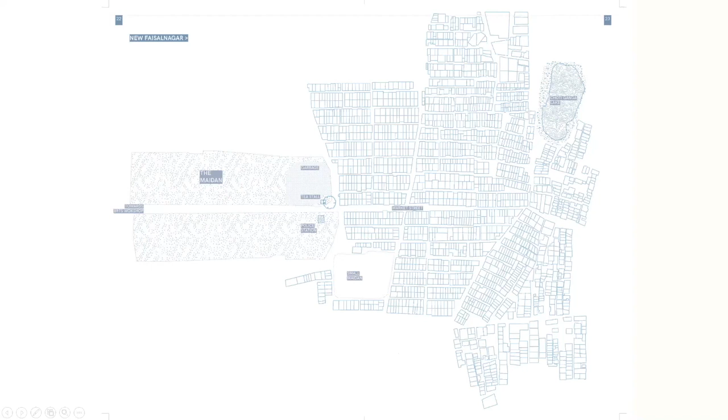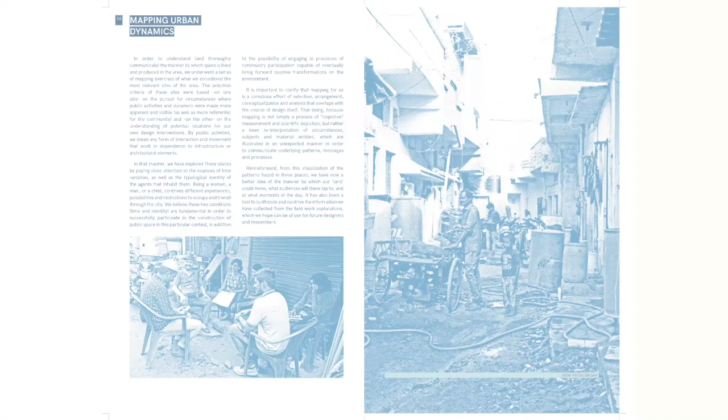So what we did is, through our own academic endeavors, through our studio that we do with CEPT University, we were studying this neighborhood very closely for about a year. We've understood that when you start to zoom into the neighborhood and map the people and activities that transpire through it...

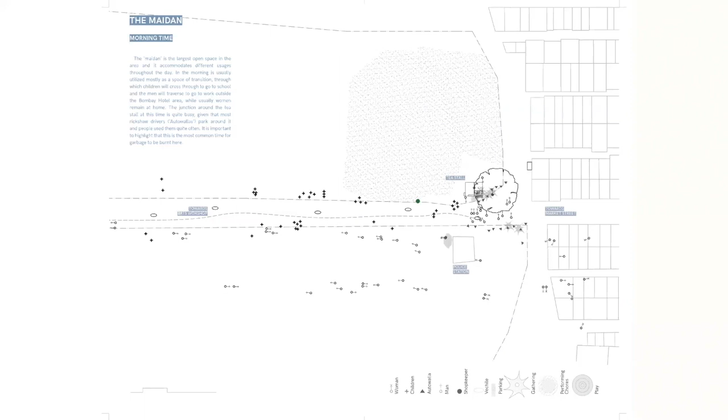...you begin to see that there is a lot more for us to understand and take in as a more complex context. You can see that the Maidan itself has its own life through the day.

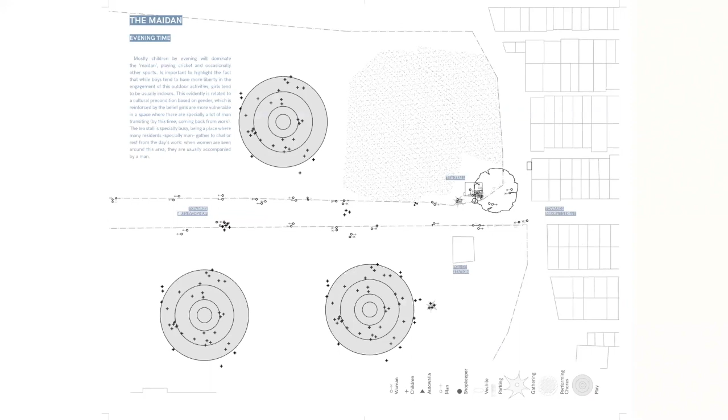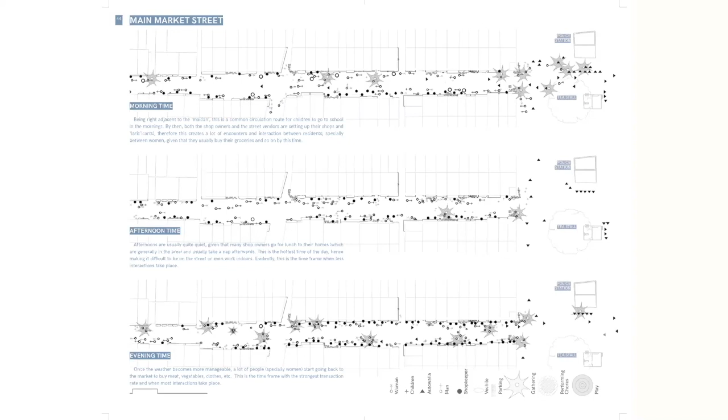You can see the way that the children and the people occupy the space, the different streets—so you have a main market street that has most of the economic activities that take place in this neighborhood.

While the interior lanes, like I mentioned before, you can very clearly see that there is a structural negligence that has led to the kind of photograph you see here. You see that water is not available...

...and therefore you see the entire landscape of the streets having these storage drums, these blue water drums, wherein they receive water through almost a kind of water mafia that exists in the neighborhood—this informal system that can replace what the formal system is supposed to do.

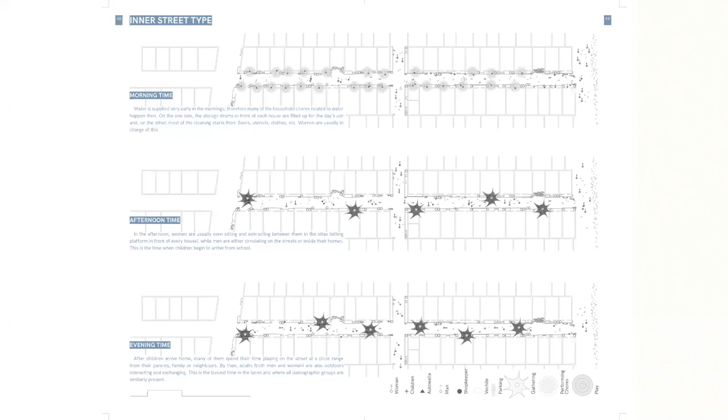You can also see that the inner streets have their own typology. It's the space for women, the space where all your domestic activities spill out. And of course you have the children who make part of this very intense landscape, and the way in which they receive their education—or don't.

After studying this neighborhood for about a year or so, we were very much interested to understand: if there are neighborhoods that do not have access to formal infrastructure that the government is supposed to provide, or what they are entitled towards, then how does one make sure that they can still move forward in their life without necessarily being at a disadvantage? It became important to think about immediate actions that can improve the life of these communities till the government or the system is able to bring in a more formal structure.

And therefore, we came up with this idea, which we call the loose space strategy. Essentially, this is the temporalness or the temporal architecture, the temporal response that one can give that can last from a few weeks to a few years, depending on how the more permanent solution can come into place.

So what we understand as loose space strategy is through this book called Loose Space, and I recommend that you read this book if you get the chance. It's by Karen A. Franck and Quentin Stevens. And what they say is that loose space is essentially a social phenomenon of appropriation, a space without absolute definition, and it has a function, form, and encompasses temporality.

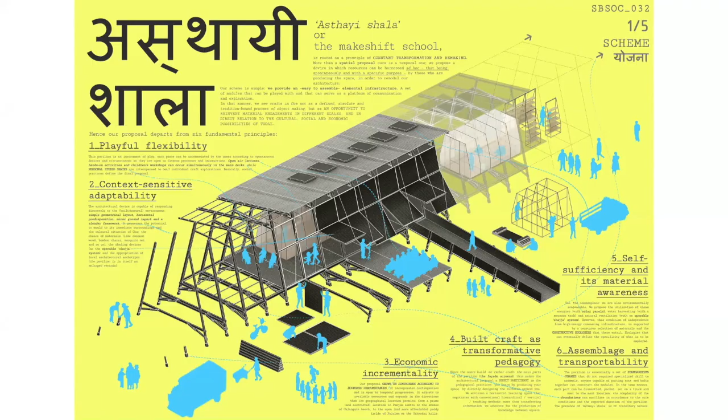So this was a school that is constantly transforming and remaking itself from the idea of a special proposal that can devise a nut and bolt system, so you can very easily screw everything together, and then when you want to dismantle it, you can open up all the nut and bolts and have all of the frames as individuals.

Put it into a truck and move it to another site. We also use mild steel sections because they are also very easily available and cost effective. Then we use bamboo because that's one of the crafts practiced in Goa. And finally, you have the solar panel and the corrugated metal sheet.

So say in case coconut palm wood or coconut timber is not available, then what is it that you can replace that with? That is very important to keep in mind because with context, the different materials change, the availability is changing, and of course your finance is always a key component when you have to look at building.

And then, of course, we have different material palettes that we propose in place of the bamboo, in place of the corrugated metal sheet, so on and so forth.

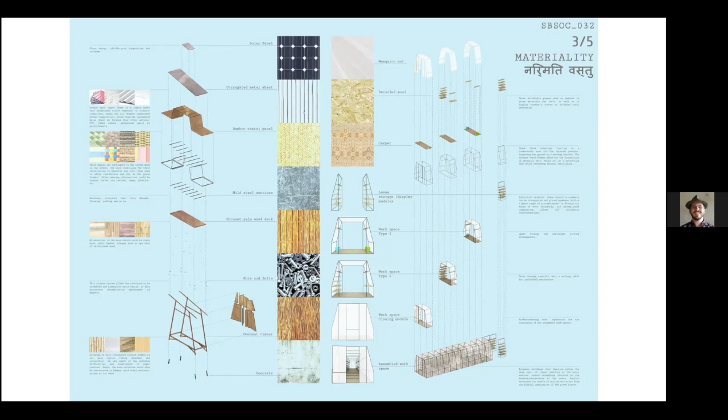While the inner pods, we thought of them as very lightweight metal frames that also have this sort of mosquito net covering. The idea was that because this is within the main structure, it is protected from the weather, and all it needs is some kind of privacy and protection from the environment. So mosquito nets seemed like the most feasible material we could take up.

So this is generally some visualizations that we carried forward to try and look at what the building was like. We also made some physical models. Here also it was important for us to look at how do you make a physical model that can demonstrate the modularity of the building.

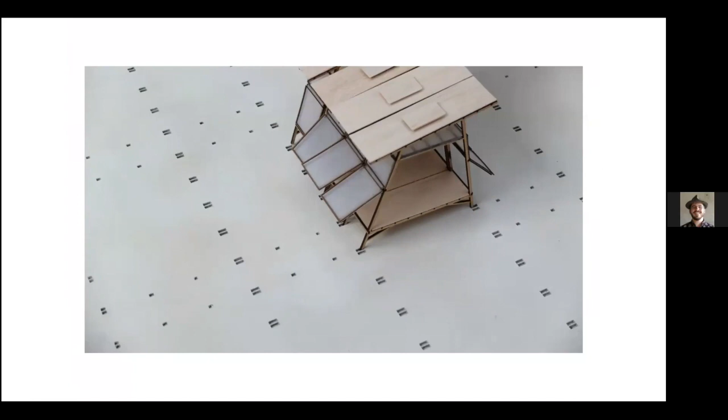As you can see, we had the base, and the model was also made in such a way that the agency of the organization of the different modules was with the people who had the module. So you can eventually change the disposition of all your modules such that you can change the format in which the building is placed on the ground.

So if you have a linear site, you can have the building be more linear. If you have something more squarish, you can change the way by which you organize your modules.

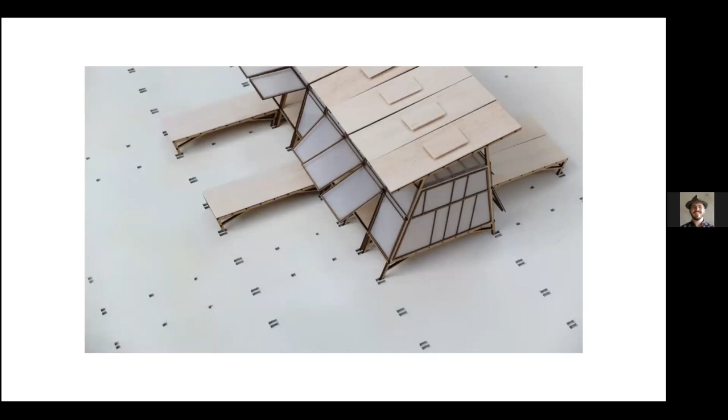I'll go on to the next project, which is called the Apni Lari. This was a project that Sebastian did as part of his master's program and his thesis at CEPT University.

And then we took it forward as something that we call the cart home. So basically, it's a device for living and working on the street. It's a public good of decentralized administration, and it is an opportunity for those in need. It provides an emergency shelter and working spaces. It's essentially a movable furniture that adapts to contingencies.

Again, something that both Sebastian and I deeply believe is part of Chal Chal agency is that for us, research is very important. Every time that we take on a project, a competition, or our own initiatives, we make sure that we do a lot of on-ground research to understand what is existing and then how can we take that forward.

So you can see here that we studied a lot the existing vendor typologies that make part of the Indian urbanity. We looked at what are the different ways by which they are mobile in nature, and what's the different transportation formats that they have.

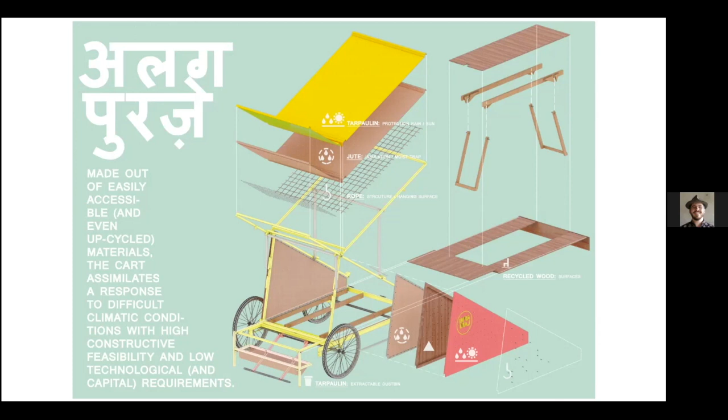There's the use of recycled wood, jute used for insulation and to trap moisture, and tarpaulin used to protect it from the sun. We used rope as a structure for hanging — it was a hanging surface, so you could have different objects hung, so your livelihood could be part of this.

Eventually, we were looking at the cycle of use — how this object could be used differently at different times of the day. For example, you can remove this bench; it's a platform, but when you remove it, you can open the legs and it becomes a bench for your customers to sit on. You have certain drop-down tables, you can make it like a lower table, and it has a dustbin within it, and so on.

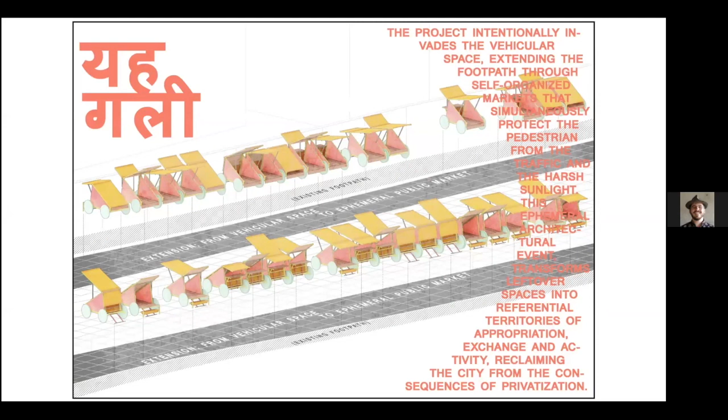Now, one of the questions we usually get asked is that we work at a very small scale, but how do we look at this to have a larger impact? That's precisely where we put in a lot of effort to understand that if one small object is placed on the street but then multiplied, how is it making the street different, adding value to the street and eventually to the public space it conforms?

Of course, eventually this project had different lives, so we also made it part of another competition that looked at refugee camps in Zaatari. We had three different modules that made part of this — one that is a larger market module, and another that looked at not only selling but also eventually could make part of a water system, and so on.

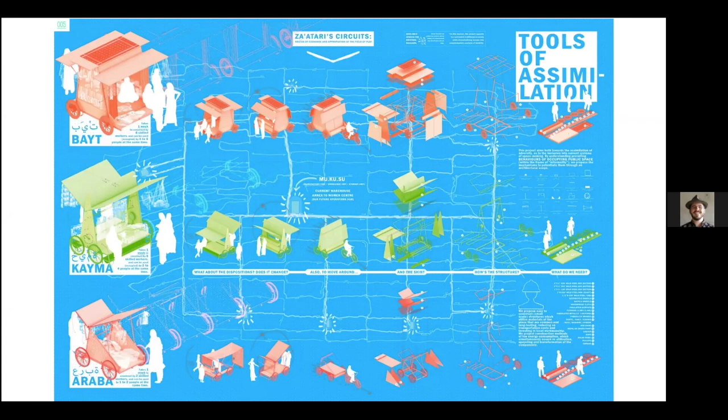Eventually the life of this project was taken to Manav Sadhana, an NGO that works at Gandhi Ashram in Ahmedabad, and they used this particular device. They were very happy to receive it — they did a whole ceremony with it, and eventually it was used for public good, where water pots were kept. Especially in Ahmedabad, the summer is very intense, so this becomes a public service of giving drinking water to people who pass by on the street.

And eventually, with this project we learned a lot with respect to how you move this, how you make it easy for it to navigate through the city — not only in relation to other vehicles and carts, but also for the person handling it. We knew all of the failures, but that's precisely the point — for us this is an experimentation, and it comes with its own risk.

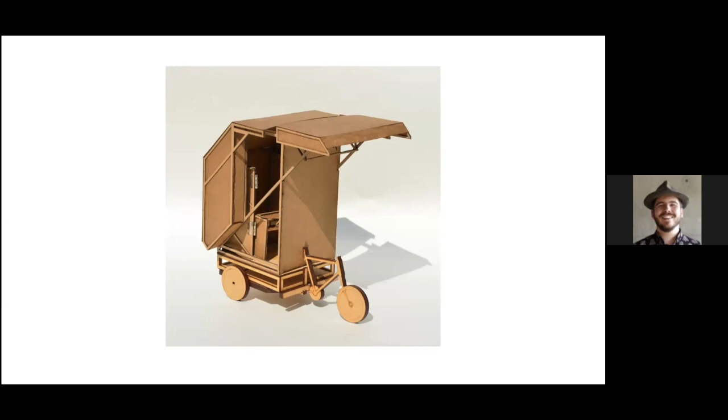As you saw in the photographs previously, drinking water is a huge issue in the community. One of the first things we wanted to do is come up with a project that could address that issue in a more immediate manner.

So we came up with this public mobile water filtering unit that can move around the neighborhood and give access to drinking water to people at their doorstep. One of the first things we did is we customized this entire base, wherein we motorized the entire cart.

It's something that we love experimenting with, which is jugaad, and I'm sure all of you know the concept behind jugaad. You can see that the front of the cart is half of a bike, attached to another set of wheels and a platform, and then we included batteries and so on and so forth.

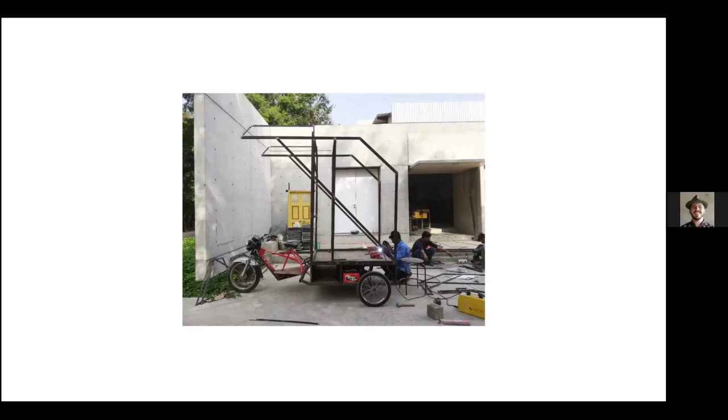Eventually we started to construct the upper structure, and again one of the key materials that we find very versatile and maintenance-friendly is metal sections. We find it very easy to use because the skills required to build with it are easily available, and the materials required are available in your neighborhood market.

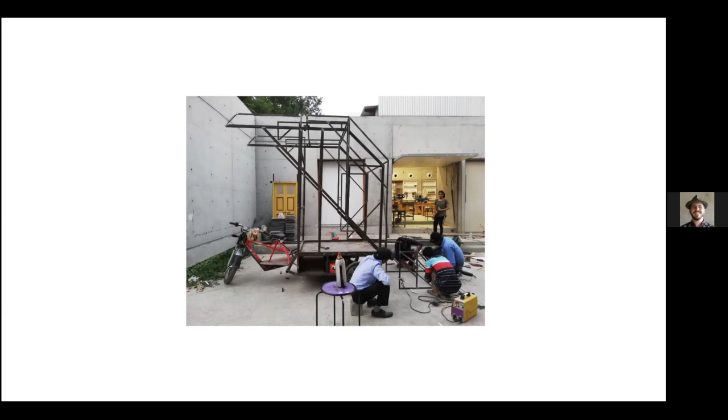For us, that is sustainable, rather than trying to look for materials that you don't find in the city and then trying to get them from other places.

What you can see here is that for the infills, we used metal sheets and plywood to make part of them. These were the welders who built this for us, and these were the carpenters who made part of the process. Engaging with them is very important for us because we learn a lot from them, and they make up a key component of our own processes.

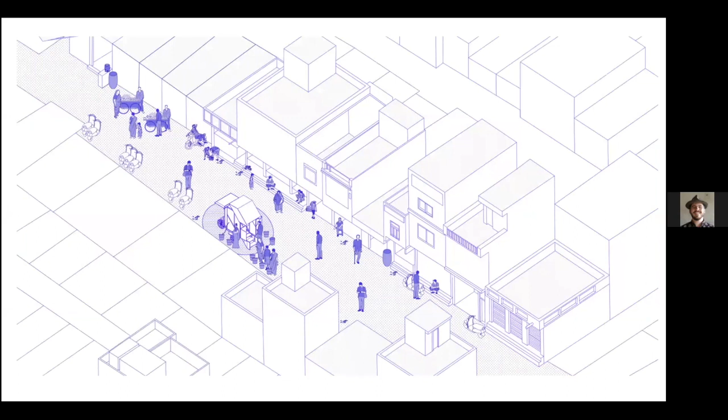This is how the project looks right now. You can see that the water filtering units were fixed. We collaborated with a water company in Ahmedabad called Sarjan, and they helped us design this entire unit such that it could give at least 40 families per week, 25 liters of water each.

Unfortunately, just at the end of this project, when we were finishing it, the pandemic hit in 2020 and everything closed down. We've not been able to go back to finish the project or take it to the site, but we're hoping to do this soon.

These are some visualizations we did of the project, because for us it was important not to just address the functional need of the hour, which is access to drinking water, but also to look at this as a device that could engage people in making space. So it became part of the public, part of the space-making exercise, but also an object of awareness.

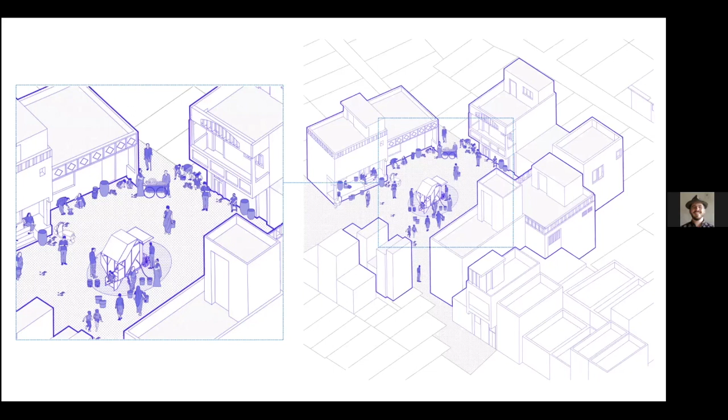In neighborhoods like this, it was very important to spread awareness about the health hazards of drinking water directly without boiling and so on. So this became a pedagogical device in itself.

Moving on, this was a project we did in 2019 as part of the winter school program at CEPT University. We called this the Gyan Ashray.

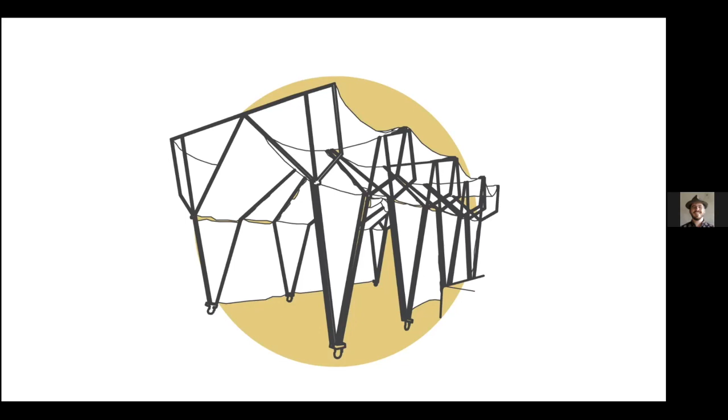This project came to us by chance. We work with an NGO called Center for Development, and through them we were introduced to Pushpa Ben. We were absolutely fascinated by her and her aspirations for the women of her community, the Valmiki community, who are usually at the edges or margins of our society.

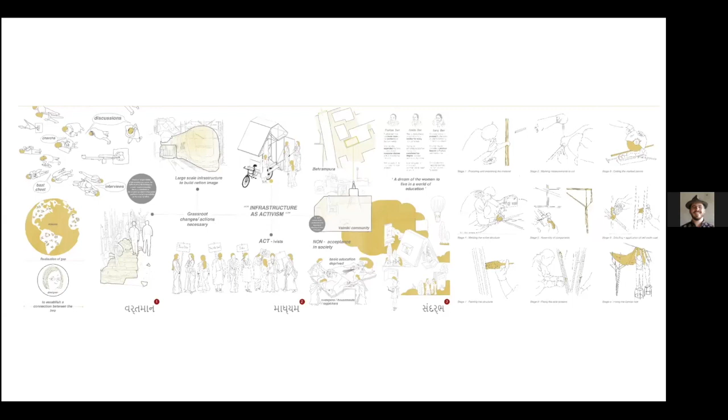For Pushpa Ben, it was very important to empower the women of her community. One of the things they do is meet on the terrace. There's a young woman called Ankita, one of the only women in the community attending college, and she, along with Pushpa Ben, took the initiative to run evening classes for the women, because they felt at a disadvantage not knowing how to read and write - basic skills they wanted to develop. They were running these classes on the terrace.

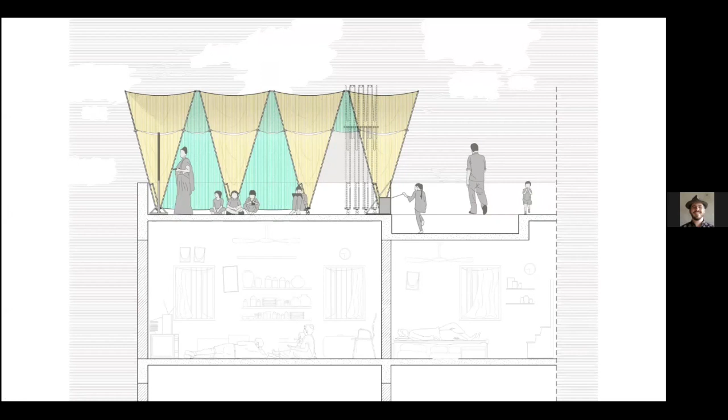Eventually we came up with this project, essentially a retractable roof that could be placed on the terrace and become the classroom for the women. I'll talk a little more about it.

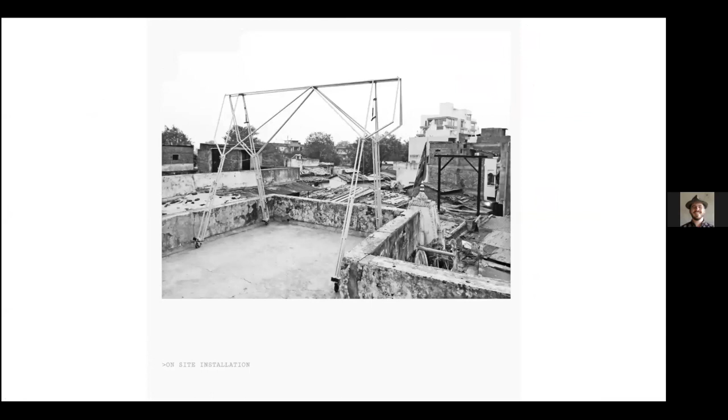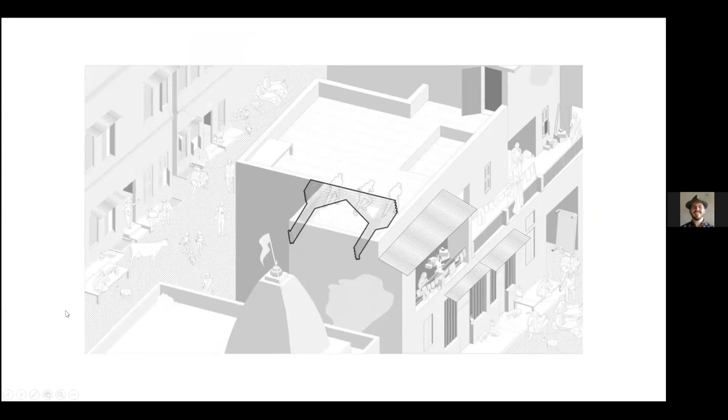For that, we constructed all the metal frames at the CEPT workshop, then transported and lifted them onto the terrace, and started assembling it there. This little GIF shows essentially how we put the entire project together - you can completely open up the roof or close it down based on the need of the hour. This is how the project looks.

Something very interesting came up when we spoke to the women - before designing, it's very important for us to have conversations with the people who will be using this. The women told us that because they were on the terrace, the neighboring terraces usually have men hanging out there, and it's part of their custom to wear a veil over their heads so the men do not see their faces.

They felt insecure and found it very difficult to be studying with the dupatta veil on their head. So they asked us, can you please create an environment wherein we don't have to keep our dupatta on our head all the time. So we took clues from that and looked at the entire veil, not to be on the head, but to be part of the structure.

You can see the structure is made out of fabrics. We also took a lot of clues from the context itself, so the fabric colors came from the way they colored their own houses. Eventually these fabrics were tailored, thought of in a way that they can easily be untied, washed and reused, or if they get damaged, easily fixed. That was something we kept in mind, to give the agency of maintaining the structure back to the women. So this is essentially how it looks.

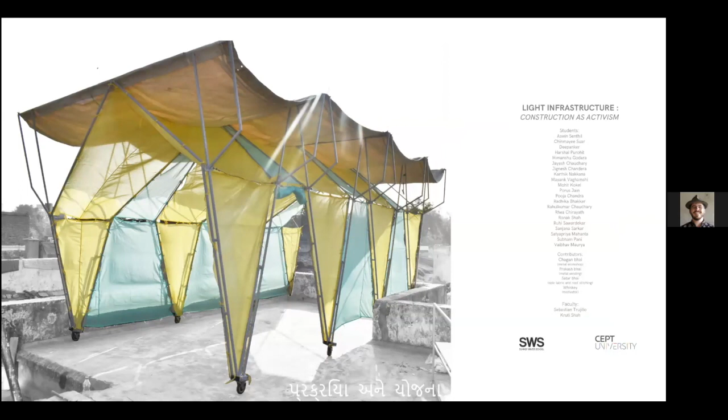Eventually they started to organize art workshops, and the structure became more than a classroom. It became a community space. It became the identity of the women of the community, and a space they were proud of. Eventually they could have their meetings here, community meetings, meetings with NGOs, and so on.

This is a project we were proposing in Colombia, in a neighborhood here. It's an informal settlement, and essentially what we were trying to understand is how we could propose a community center, a mobile community center within the settlement.

To give you some context, Bogota is essentially a very mountainous city, and usually the informal settlements get pushed to the slopes of the mountains, so they are in terrain that is quite difficult. Within this, there is also a lot of violence that occurs in the city, a lot of clashes between different groups.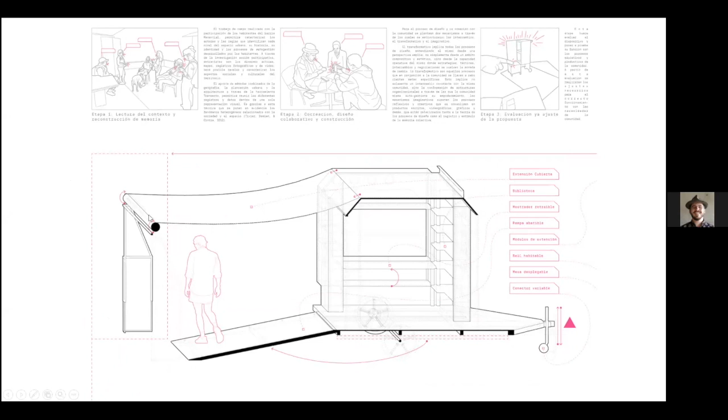You can see this kind of device that makes part of the shading, so you have shades that can be extended. Something small can be extended to make part of a larger community space. We created small mobile units that could house books, making part of a library, and a table and stool system so larger meetings can take place. These are all the different components that make part of that one device, and everything can be tucked into it.

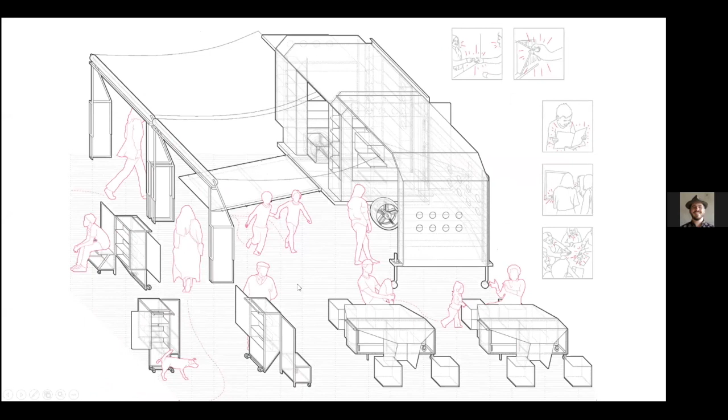In terms of materials, we were looking at L sections in this case. To make it more lightweight, we had plywood, and then we had a lot of fabrics that we were making part of the project.

So this is again a visualization of what we think the project could do. I'm coming to the last bit of my presentation now. This is a year and a half research academic project that we've been carrying out, called Unit Light Infrastructures.

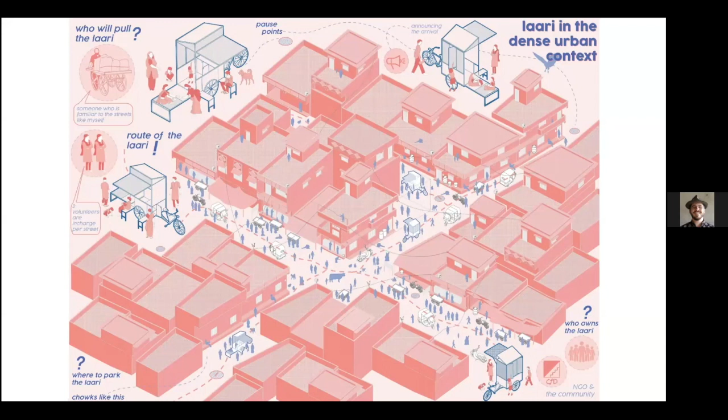We were trying to understand the entire functioning of how women in these communities access public space - where are the different places in the entire community that they sit at, gather at, and so forth. From that understanding of the community, and of the different spatial configurations - things like temporary shading, water infrastructure, the kind of otlas that make part of the architecture itself - those were the clues the students used to make their own mobile device.

You can see here they came up with the entire design development of the project, such that it went beyond the brief that we set up. It went beyond just a device that made sanitary napkins available door to door, and started to become a device that became the identity of the women.

So it became something that could have workshops for women's empowerment, could raise awareness for menstrual hygiene, could also show documentaries and screenings for the women and girls of the community, could carry books and games for the children, because children are usually part of the system whenever you think of the women. And of course, it could engage people in different activities.

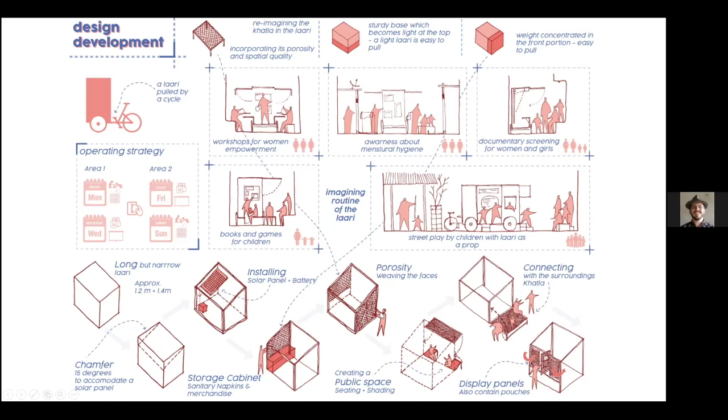Something that was very interesting about this project, and the reason I chose to show it, is the use of the khatla - the weaving that goes into the khatla as part of the identity of this device.

Again, it's something that comes more from a do-it-yourself attitude, as to how you can make the whole device and make the infills of the device yourself.

Another thing we do very consciously in this studio is try to look at design as something that doesn't stop with just the 3D form or the aesthetic making of the project, but goes beyond that, because design is also about how you implement. There's no point to a design if you don't know how you're going to implement the project.

You can see here that the students engaged with the local NGO that works with the community. They spoke to a lot of the women - we had focus group discussions to try and understand what they felt about the design, and then made changes as per the feedback given.

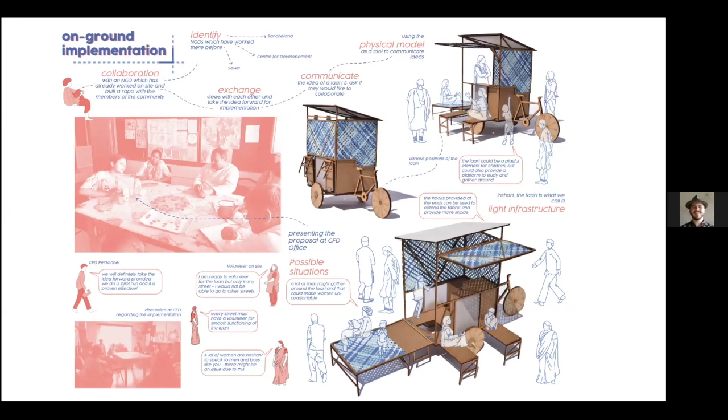The first time we did this studio, there was no pandemic, so we were actually going to build a 1:1 prototype of the project. You can see here we started it, but then we had to stop the entire process.

What the students did is go into the market, research the different materials that were available, bring back samples, and make mock-ups of the different joineries that were going to be part of the working of the device.

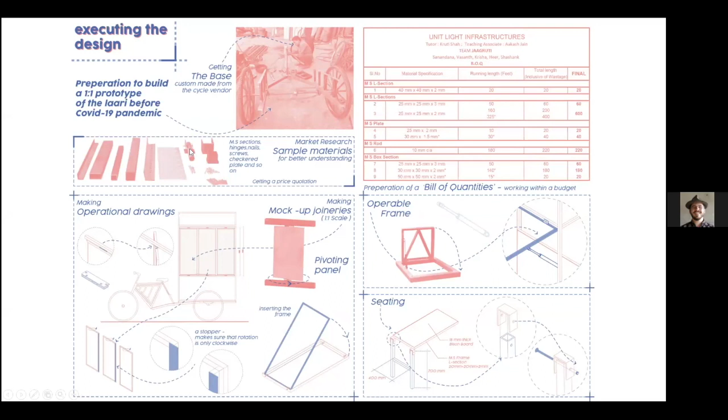For example, if you're using these pneumatic levers, how is it going to work? How do you close it? Where do you fix it? If you're having foldable legs, then what is the kind of joinery that you should make part of it?

Eventually, because the studio went online, we transformed the entire studio and had them make construction manuals, which we thought were very useful to virtually understand the construction process of making such projects, and who are the different stakeholders and users who are part of the entire building process.

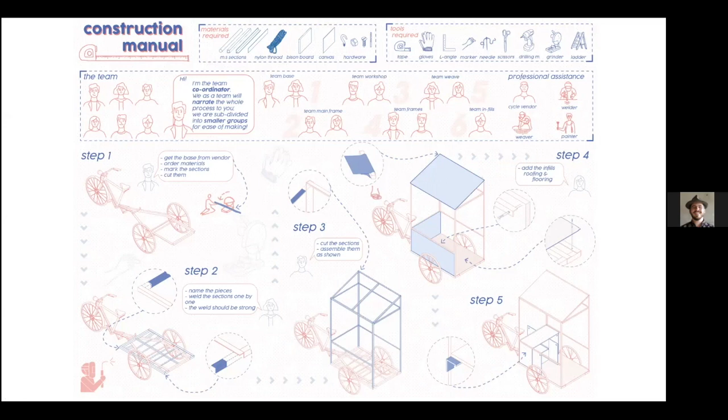You can see these were all the different components that made part of understanding the project. There were details worked out with respect to how you fold things, how you make sure the legs of these fold-out seats were protected, and so on and so forth.

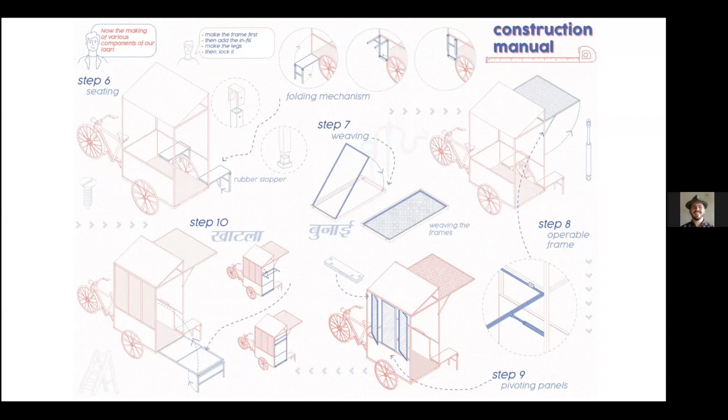This was a little video that one of the students made, and I thought you all could watch it, because it's also a different way by which you can communicate what you want to do with the design.

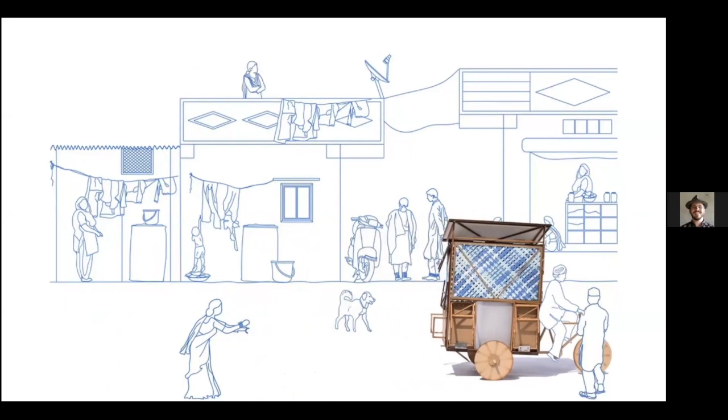So we've run the studio three times. This is the second time we did it fully online, and we transformed the entire design brief to look at transit settlements within Ahmedabad, and how to rethink transit settlements as part of the city.

Transit settlements are groups of people displaced due to infrastructural projects within the city. For example, in Ahmedabad it was the riverfront development that displaced thousands of people. These people were promised housing by the government, but were moved into transit settlements on a temporary basis on the outskirts of the city.

One such settlement is Ganesh Nagar, which came up essentially because of the riverfront development.

As part of this project, students were encouraged to think about how transit settlements can become part of the city, and how to dignify these living conditions, because essentially the government gives a family a 3 by 4 meter plot of land, and then they're left to build their own house, without water supply, without electricity.

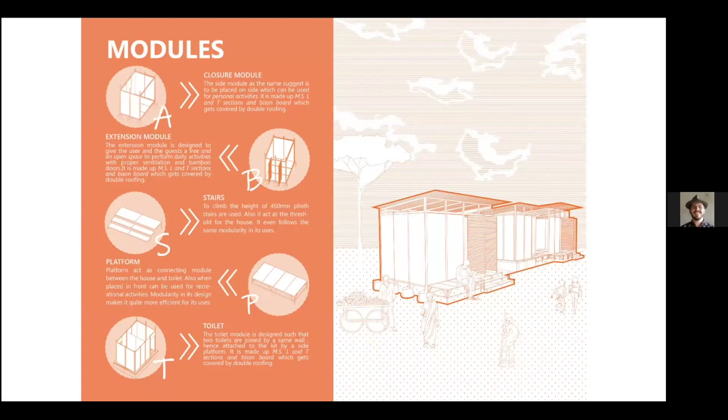The entire housing unit was made with different modules that make up the unit itself. Depending on how many modules you use, you can expand or contract the housing unit. For example, if there are more people, or if my daughter got married and the couple needs their own private space, you can attach more modules, looking at incrementality as value addition to the whole concept of housing.

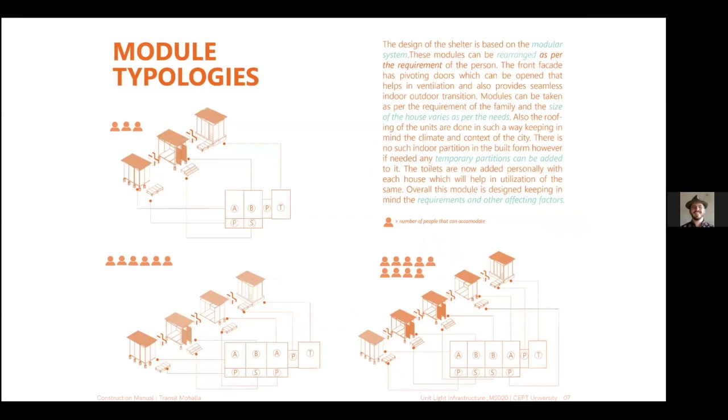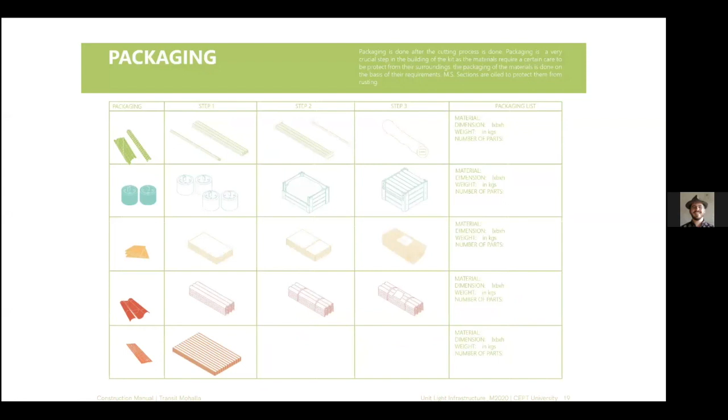One of the key materials used in this case is slotted angles. These are metal sections that come with pre-made slots as part of the section, available in L angles, T sections, C sections, and so on.

What's great about this material is that you can nut and bolt it easily, and you don't need expertise in welding. That's very important, especially since we were looking at these housing units as more of a do-it-yourself or do-it-with-others concept.

It's very important to think about how easily someone can put this together. You can almost think of it as a flat-pack IKEA system, where you receive the kit of parts, open it, follow an instruction manual, and have the housing unit ready to occupy.

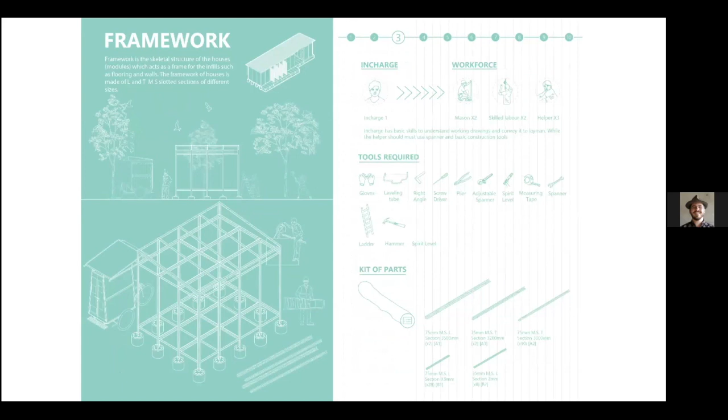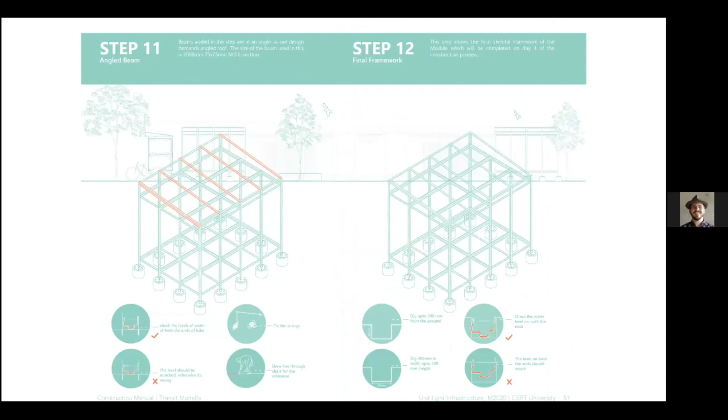Something we do in the studio is create construction manuals. The students demonstrate small nuances to understand the different aspects of the design process, because design processes aren't just done on your table, but also transpire on site while you're building.

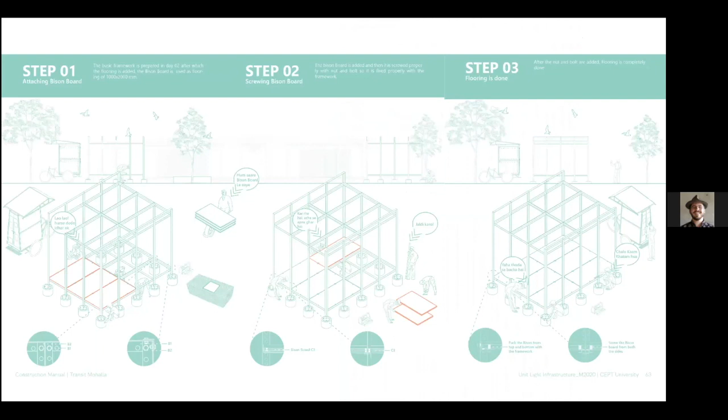I'll walk you through some snippets of their construction manual, but the whole document is available on the website, so I recommend going to see it if you wish. You can also see how the students talk about creating these extensions, and the entire process and stages that make up the building process itself.

Something very important that I missed out earlier is the use of something called bucket foundation. Since you guys are making vaccination centers that are meant to be temporary and not remain on site after use, we found these bucket foundations very interesting. You can use a bucket to make small concrete blocks embedded in the ground, and fix your metal sections by welding or bolting them onto the top of the bucket foundation. For me, that was a very easy way to resolve the idea of foundation, because usually when building something, foundation is problematic since it's supposed to be permanent.

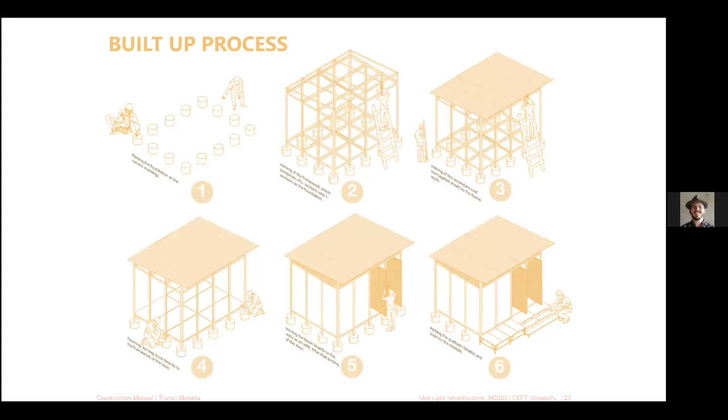This is work from the semester we just finished. Again the brief was the same, but this time we split the entire settlement into 6 components that make part of a larger neighborhood. So you not only have the housing units, but we also came up with something called emergency public architecture - public architectures that make part of community spaces, which I'll show you what the students did with. Then of course you have mobile devices, because mobility and mobile devices make a key component of how the city is built. Then you have structures that make part of the public space, play areas, and so on.

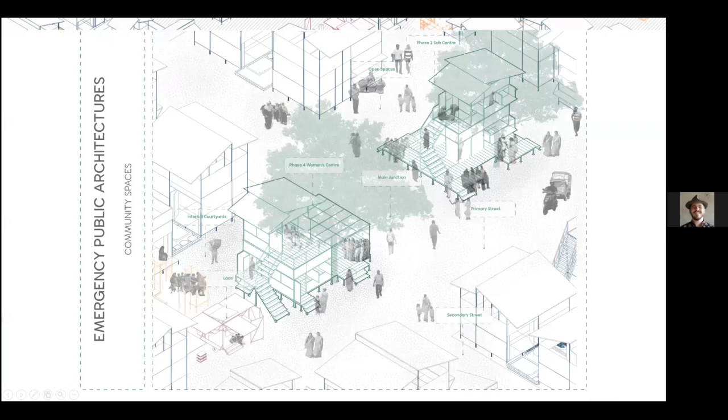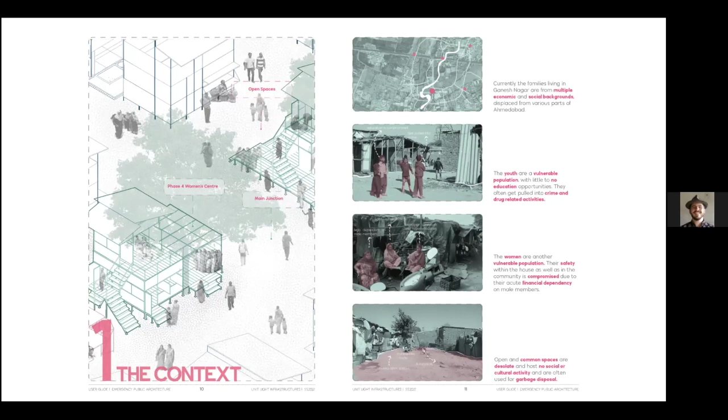I'll walk you through the emergency public architecture - these are essentially your community spaces. What is an emergency public architecture? After looking at the site and understanding the different people and stakeholders, the students recognized that the youth and the women were the most vulnerable population of the site. Therefore, they felt the need to make centers that could become safe spaces for the women and the youth. So you have the women's center and the youth center.

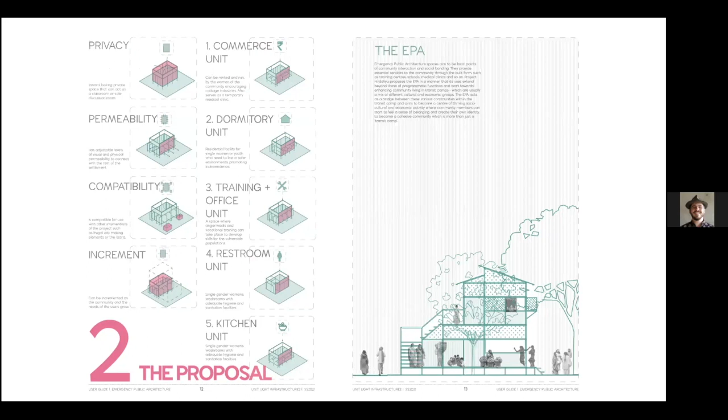They thought of this entire proposal as different kits that can grow and have incremental value through the different phases of development of the neighborhood. So it looked for privacy, accounted for the economic factor, had a dormitory, an office unit, restroom unit, kitchen, and so on. They basically came up with 3 centers: the women's center, the sub center, and the youth center.

The materials they thought of using in this case was scaffolding, which is very popular nowadays - you see scaffolding being used a lot in student projects. But while we were exploring scaffolding as a material, we came across this labor housing done by a practice called Hatch Workshop, in Ahmedabad. We visited the labor housing and saw that scaffolding as a material is very diverse and nuanced, and it allowed for very easy construction and dismantling whenever necessary.

So what the students did is imagine this entire thing to be built up in phases. For example, with the women's center, they first identified the 2 key things required to start - the office and training center were important. So you start with a basic unit, then attach a secondary unit which becomes the shop for the women, and eventually you can increment it onto the first floor and increase it in size. That's something scaffolding allows, because it's a modular system - you can increment it depending on the sizing of the modules you use.

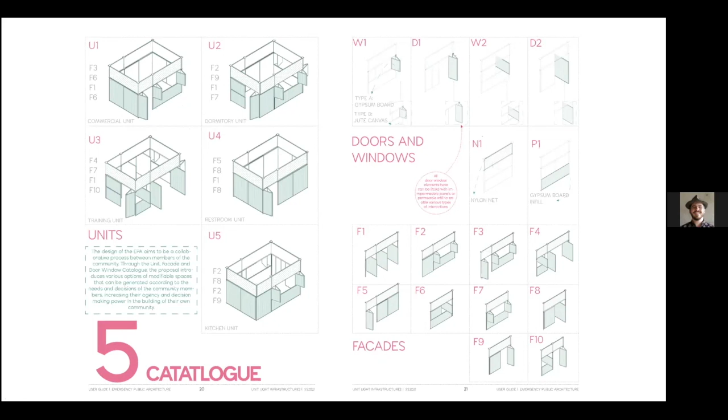Something else they did, since they were using scaffolding as the main structure, is develop a catalog of parts - for each unit, what are the different kinds of windows or doors that can make part of it. So depending on the kind of unit you want, whether completely closed or completely porous, the agency of deciding then went to the women and the youth.

And like I always stress, understanding how you implement the project is very important. Even though you are doing a very small time problem, I think it's important to think about who maintains it, who owns it, where does the money come from, and so on. I think that's a very key part of design processes.

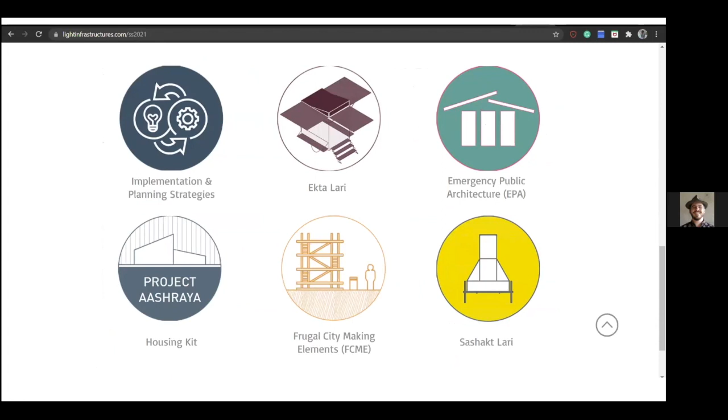These were the other projects that made part of the studio. Like I said, you can have a look at it on the website here. If you want, I can share the link with Neha and she can share it with all of you. But yeah, I think that's the end of my presentation - you can look at more of our work in detail on our website. Yes, I'm done.